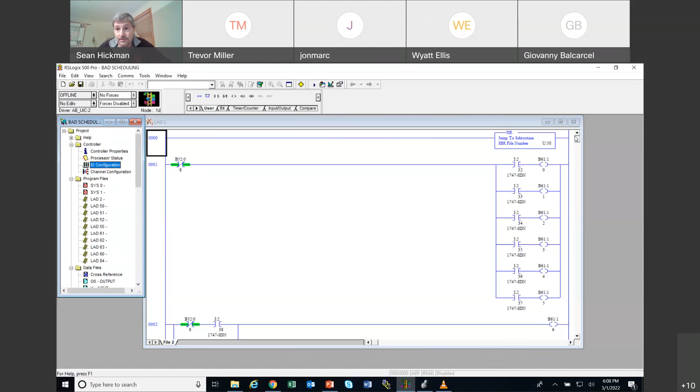But if you come here, you see that there are no rung comments. There's nothing labeled. There's a ton of bits. None of the inputs have anything on them for what is going on. Here's an unconditional jump to a subroutine in here. Here's your SDN. Here's your DeviceNet. Zero labels. I mean, can you imagine trying to troubleshoot this thing?

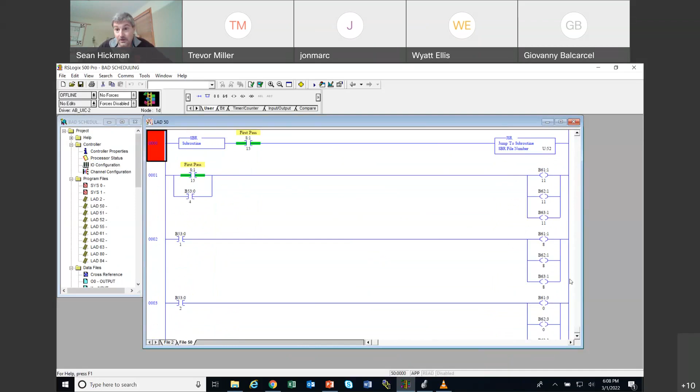Here's ladder 50. Once again, all kinds of bits being addressed here, parallel, series, a bunch of jump to subroutines. So jumping to subs within the subs. These ones are conditional jumps to subs. Ladder 62, here's your timers, your done bits. And it's just bizarro how crazy this is.

I don't know. There's a latch bit right there. I don't know what this is. Look at this. Latching all these bits on. If I come right here and I do a cross reference on this bit, okay, look at this. It's in different subroutines. You're not supposed to use this more than once, but you got this latch and unlatch being used in multiple different subroutines and everything like that.

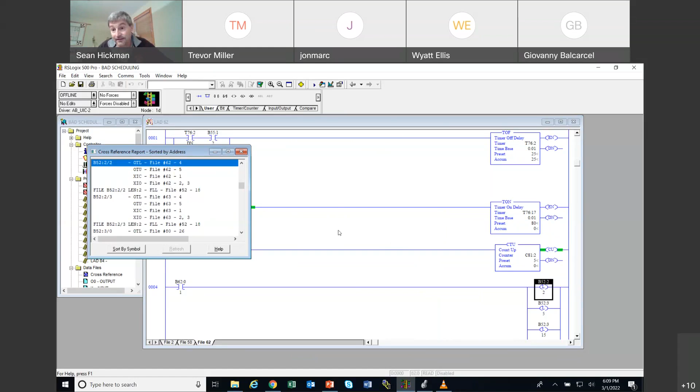So it's crazy. I couldn't imagine being a tech or a controls engineer and someone says, hey man, the press is down, go fix it. Something's wrong with the program. You'd never, ever be able to find out what the heck was going on here.

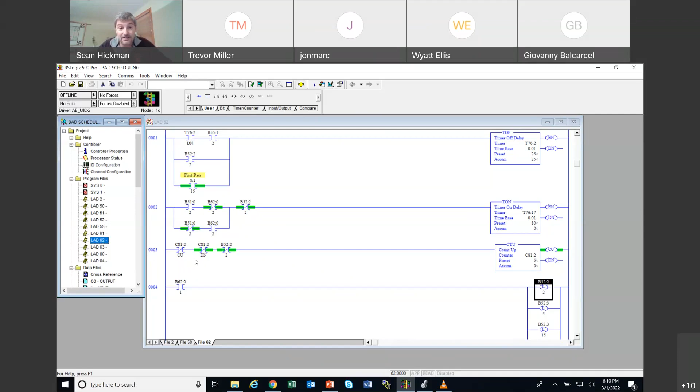And so as we move forward, I really encourage you to do a good job of mapping your I/O, keeping it organized, do a good job of rung comments, do a good job of coming up with tags that make sense and that are good descriptors of what is going on. Okay, so I always find that funny when I pull stuff down. Sometimes it's good, but a lot of times it's really garbage. I don't know why people do that. But anyways, bad programming.

Number systems and codes is what we're talking about. We're going to start with the decimal system. And the decimal system, we all know. This is the ones place. We start with 0 and we go to 9. And then this is the tens place. Once again, we're going from 0 to 9. But basically this is 10 to the 0 power, and this is the 1 spot. This is 10 to the 1 power, so that's the 10 spot. This is the 100 spot, 10 squared. This is 10 to the 3rd power, 10 to the 4th power, 10 to the 5th power, 10 to the 6th power. We all know how the number system works for decimal, okay?

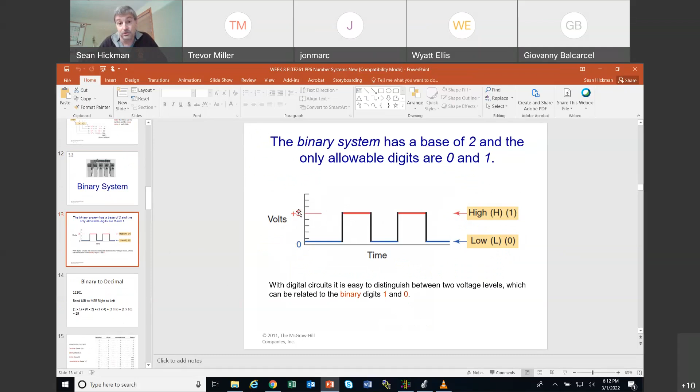And I don't want you to get too confused when we get to binary or octal, but just be aware that you don't have as many numbers to use. We have 0 through 9. Octal has 0 through 7. Binary has 0 through 1, all right? And binary, once again, is on or off. Here +5 volts triggers the high, and 0 volts is the low. But these thresholds could be 20 volts, whatever your machine is, right? But somehow you have a digital circuit distinguishing between on or off, between voltage and not voltage, with some threshold there. But our 0 and 1 is what we have.

And so what we have with our binary is least significant to most significant. So this is 1 1 1 0 1. I think everybody does pretty good at these. So I want to convert this to decimal. This is the 1s, the 2s, the 4s, the 8s, the 16s. It would keep going. So right here I've got a 1, a 4, an 8, and a 16. I just add all these up and I get 29. What do I have on my screen? I got 29, all right? 1s, 2s, 4s, 8s, 16s, 32s, 64s, 128s. So that's your binary to decimal.

I think I'm going to do another one here in a minute, so maybe I'll ask you that. But here's our decimal system. Once again, decimal goes 0 to 9. When we run out of numbers, we start over at 0, but we put a 1 in front of it. And when we go 0 to 9 again and run out of numbers, we go to 0 and advance the next number, and it keeps going like that. For octal, you only have 8, so you go 0 to 7. When you run out of numbers, you go to 0 and put a 1 in front. Run out of numbers again at 7, you go 0, you put a 2. Run out again, put a 3, okay? Hexadecimal has 16, so you go 0 to 9, and then A to F.

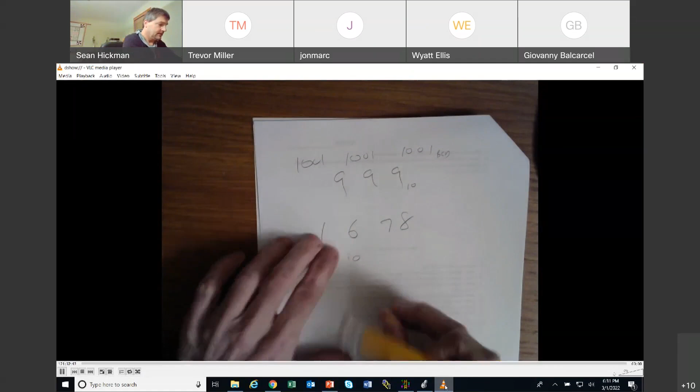Okay, so binary coded decimal, convert this. It's 1678. So here we go. I got 1 is 0001. 6 is 0110. So I got a 2 and a 4. 7 is 0111 and 8 is 1000. So there's my number right there. I just converted the 8 into this, the 7 into this, the 6 into this, and the 1 into that.

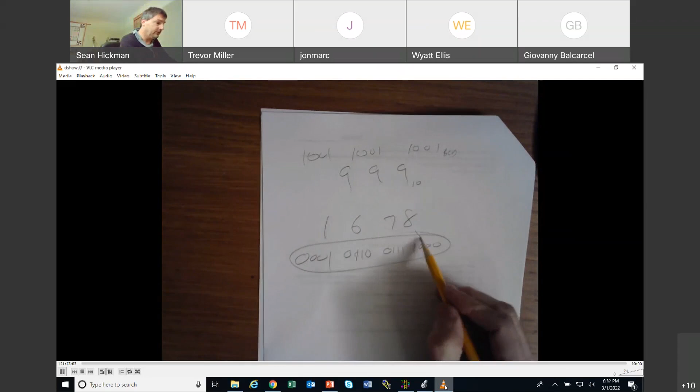And then I got to write BCD down here because it is not binary. It's binary coded decimal. It's different. And you'll notice if I come to my thing right here, I don't have the option of going to binary coded decimal. I cannot directly do that using my little cheat here on my program. You got to figure that out, but I think it's hopefully pretty straightforward, and that's what it's showing here.

I got 7, which is 1 plus 2 plus 4 is 7. 8 is just the 8s. This is the 6 and there's the 1. So how do you feel about this? That makes sense? Converting this decimal to the binary coded decimal? Kind of simple, right?

All right. To distinguish between them, you have to have designation. You know, base 2 means binary versus BCD means binary coded decimal. If it had a 10 here, that's just like a normal 49. That's base 10 that we work with. Or if it was 47 base 8,

presuming there's binary coded octal, oh my gosh, it's not really there, but you know, if you wanted to come up with a number system to defeat the Russians in Ukraine, or somehow mess up their computers, you go for it. You could do something crazy if you want to, but it wouldn't exist for anything that I know of.

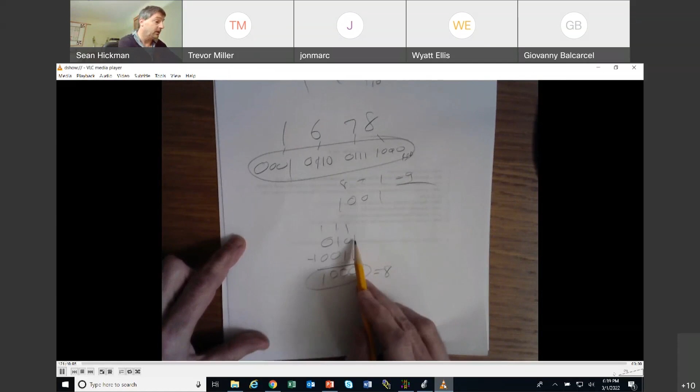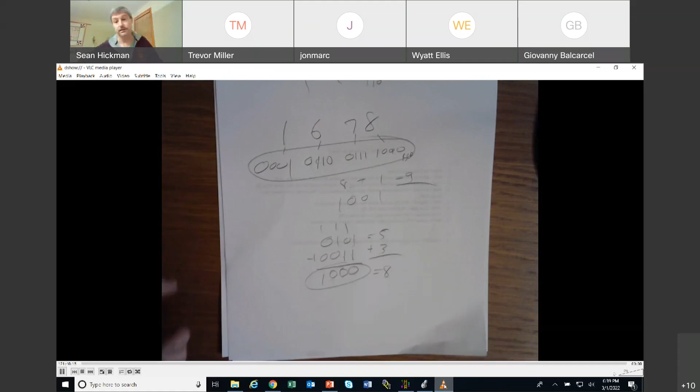8. Is that right? Well, let's think about this. This was a 1 and a 4, so this was 5, plus 1 and 2, 3. 5 plus 3 is 8. So it works. You can add. Does that seem reasonable to everybody, what I just did? Yeah? Want me to do another one, or you guys got it?

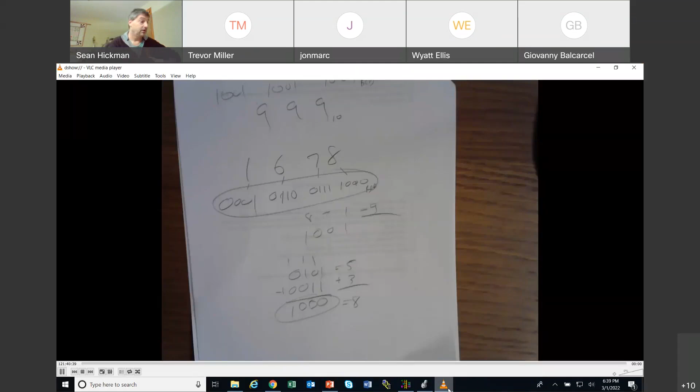Everybody okay? Let me know if you want me to do another one. I'll do another one. 5 plus 2 is 7. We all know that 5 plus 2 is 7. So let me just do 5 plus 2. So 5, by the way, is 0101. That's 5. Plus 2, 0010. That's 2. Okay. And so I added them.

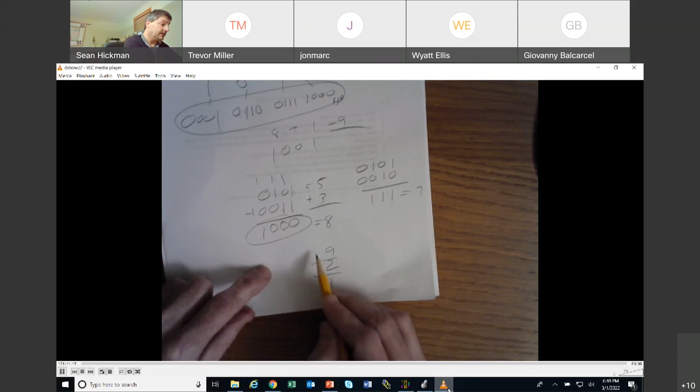I just get 111. So this is 1, 2, 4: 4, 5, 6, 7. It just adds right away there. I didn't have to do any carrying or anything like that. So just remember, when you do regular math, if you get 9 plus 2, there's no such digit. You run out of numbers, so you get a 1, you've got to carry the 1. It becomes 11. And that's all I was doing with all this carrying and stuff here. Mess around with it. I think it's in the textbook as well for you to take a look at.

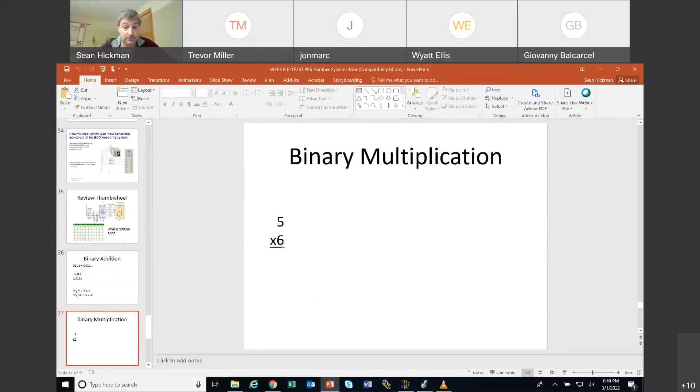Multiplication. 5 times 6. Let's do it. I'm doing 5 times 6. 5 is 0101. And 6 is 0110. So we do 5 times 6. So I would go 0000 because I got the 0 there. Put a 0 here. 1 times 1 is 1. 1 times 0 is 0. 1 times 1 is 1.

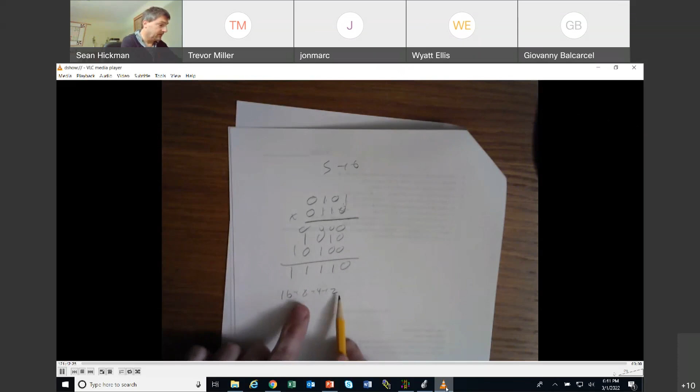0, 0. 1 times 1 is 1. 1 times 0 is 0. 1 times 1 is 1. 0, 1, 1, 1, 1. Ooh, is that right? So this is 2 plus 4 plus 8 plus 16. That is going to be 30. 5 times 6 is 30. So it works, just like our math works.

You just got to think about it a little bit, the way that you always have to carry if you have anything bigger than 9. In this case, if you have anything bigger than 1, you got to carry it. Okay? With a little practice, multiplying it as well.

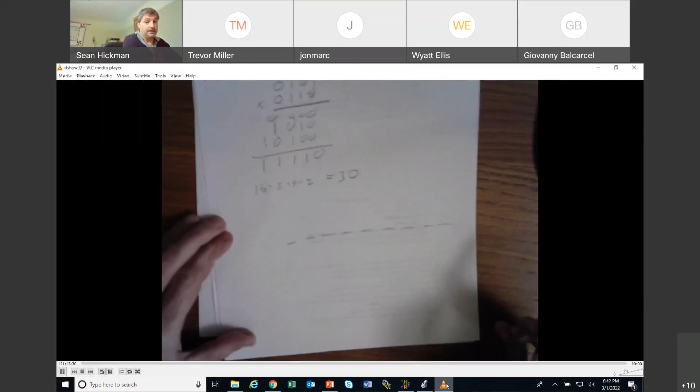Many PLCs allow you to change the format of the data on monitor displays. That's where I was just showing you the radix, where you can go binary, octal, hexadecimal, whatever. It's there, and I use it to cheat a little bit. So I use the PLC as a conversion. If I want to have a PLC move to turn on outputs 1, 4, 7, 10, and 12. So basically, you've got a word here, and if I wanted to output 1, 4, 7,

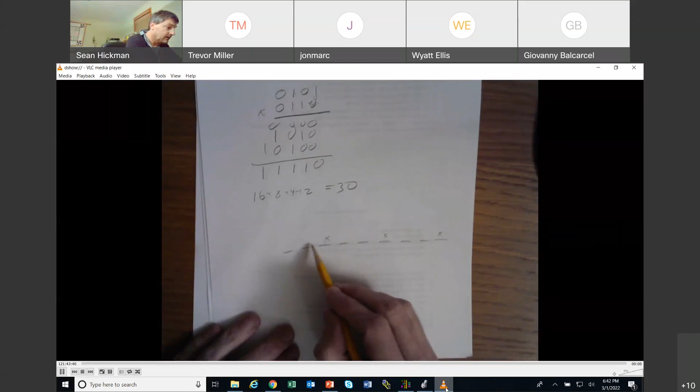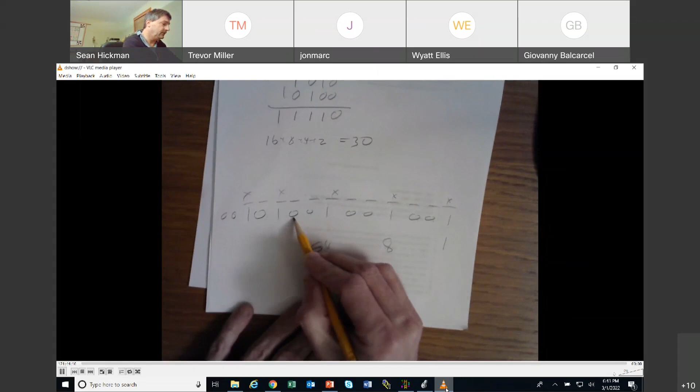10, and 12 on. If this was my word that I wanted to turn on those outputs, this is 1, 0, 1, 0, 0, 1, 0, 0, 1, 0, 0, 1. And then there's some zeros out here, but it doesn't really matter to me. Well, what I could do is I know that this is 1, 2, 4, 8, 16, 32, 64, 128, 256, 512, 1024, 2048. So I convert it and I add all these numbers together.

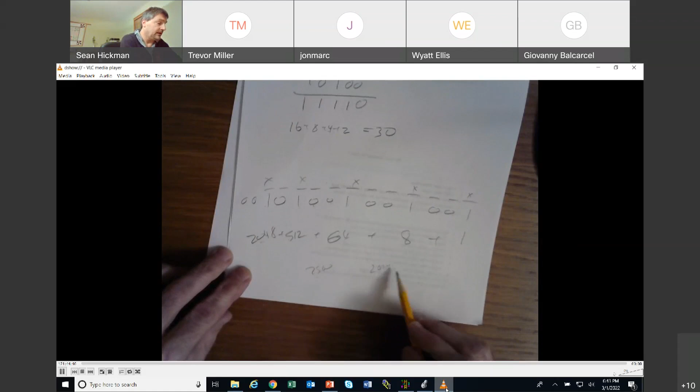I get, I don't know what I get. I get about 2560. I got 2560 plus 64, 2624, plus 9. I get 2633. That's my decimal equivalent to this number right here: 2,633. All right. So let's say I'm going to make a little program right here.

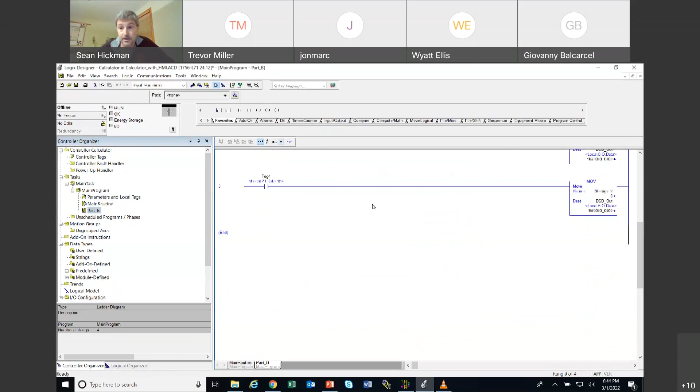Let's make one down here. I got to move this out of my way. If I put in a rung right here, and I put an instruction, something that's going to trigger this. And let's say I did a move. My number was 2633, and my destination was going to be my output module.

So do I have an output module here? It looks like I have a local 5 output right here. I just picked the entire output module of the controller. Let's verify that I did that right. Let me come over here. 5 is a digital output. Yep. So if I hit this switch, it's going to move the number 2633 into the output module.

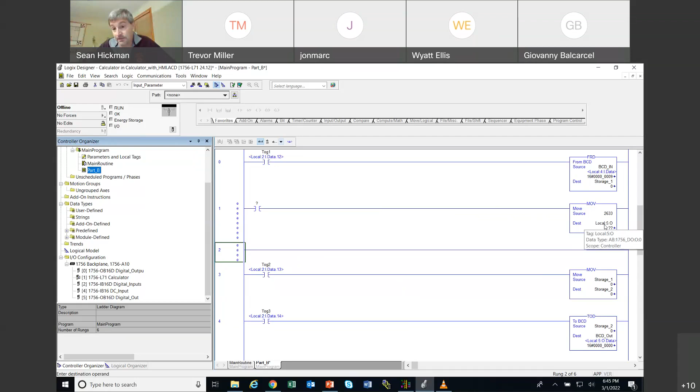Well, what does that mean? 2633 is represented by this binary number 0010 and so on. So if that output module gets that, then this light's going to come on, this light, this light, this light, and this light. And then those lights will be on: 1, 4, 7, 10, and 12.

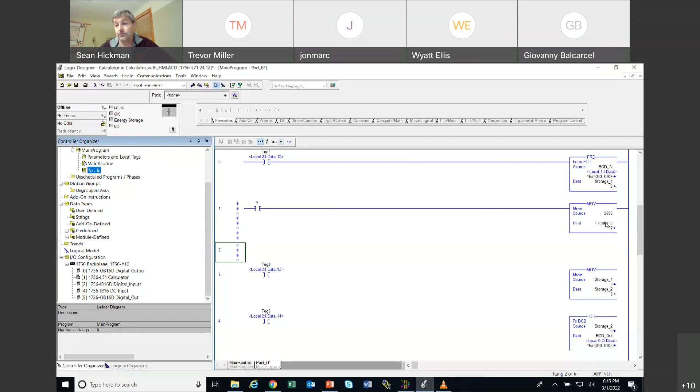All right. So as I explain this right here, moving a decimal number into that destination will turn on the lights associated with the binary version of that number.

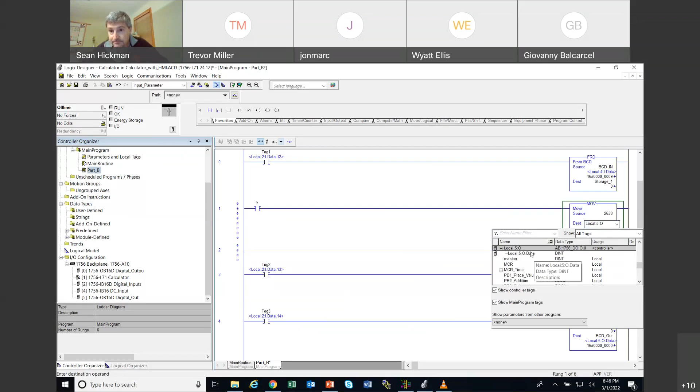I'll say it again. Moving a decimal number into an output module, not a specific one. I did not drill down here and pick data or anything like that. Actually, I should have picked data. I'm sorry, I should have. I got to pick data like that. I got to pick the whole module. That when I move this in here, I'd get a 1 here, a 4, 7, a 1, a 10. The ones would go there, and the lights would come on.

How do you feel? Do you understand what I'm saying there, on a scale of 1 to 10, of how that move works? Because we'll be doing it. You're going to be moving stuff. The output module here is a double word. So when you move ones and zeros into it, those outputs are going to come on, or it'll read inputs.

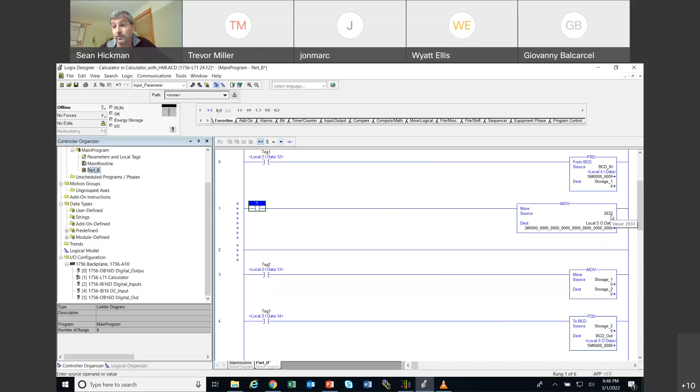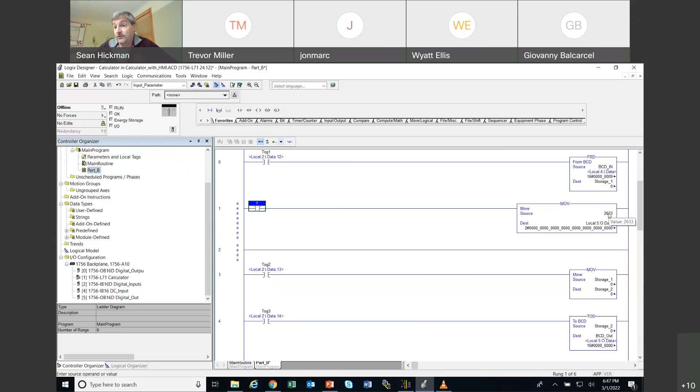So if I activated this, this double word right here would get moved into this, that would get moved into there, okay? And so this move takes this value right away of 2633, and then it'll move it and convert it to decimals there. Or you could do this. You could come right here. Oops, I was there anyways.

Watch this, everybody. Watch what I'm doing, because it doesn't take binary here. This move is taking a decimal, all right? Or it could take a tag, because we no longer have N7s in this. It'll take a tag. So I came right here and I called my local tags. My tag is masker. Sorry. I could come right here and I could pick masker. Okay. And then look what pops up, 2633, because that's what I had in here for my little cheat.

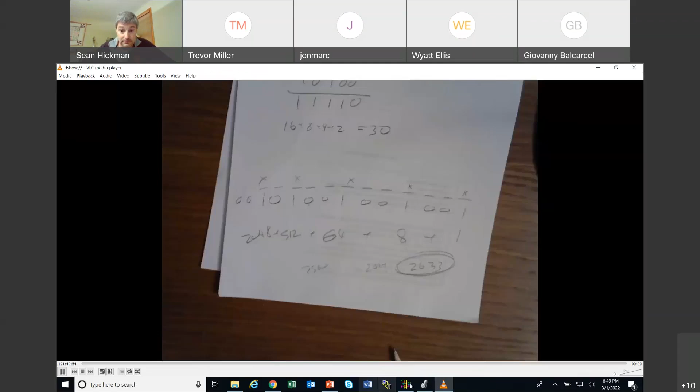And if for some reason I wanted 4532, I don't know whatever that is, 4532. Well, that's part B. It's going to move 4532 into this output module. Well, what is 4532? I don't know. Here again, sorry, I keep going. All of these numbers right here is what 4532 is, okay?

And so that's why being able to go back and forth between binary and a number is important, because a lot of times we're using moves and moving a number into a device, and this was an output module. Later on, we're going to be moving a number into a variable frequency drive. And each one of these ones means something. This one means forward or reverse. This one means accelerate, decel. This one means 3 seconds. Every single one means something. So whatever number you push into the variable frequency drive with a move is important.

And so you're going to need to convert those numbers, or put them into a temporary holding location. Mine's called masker. And then you could move masker into there. So when we're doing sequences, stuff like that. Basically we're going to be doing file and word manipulation, and that's why we're converting between the two. All right. So does everybody see how it might be important to know what this number represents as binary, if we move it somewhere that wants the binary number? That's what we're going to be doing.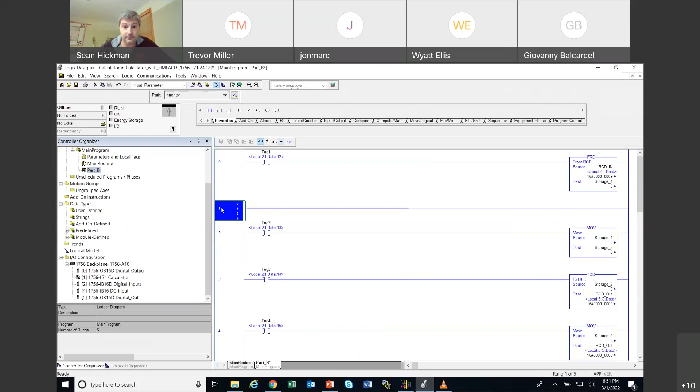So this I don't want. This I don't want. So what we're going to do is we're going to bring a number in to decimal, all right? And so this is going to be the command that I was showing you that does a lot of the math that was occurring in here, that instead of burning it onto a chip, the PLC's got an instruction set that does that math for us.

So it says BCD in, and that's local 4 I data. So it's going to take the entire status of the input module. So depending on what inputs you have on, like 1011011011 whatever, it's going to turn that into a BCD number, and then we got to store it somewhere. Okay, so that is what this command does.

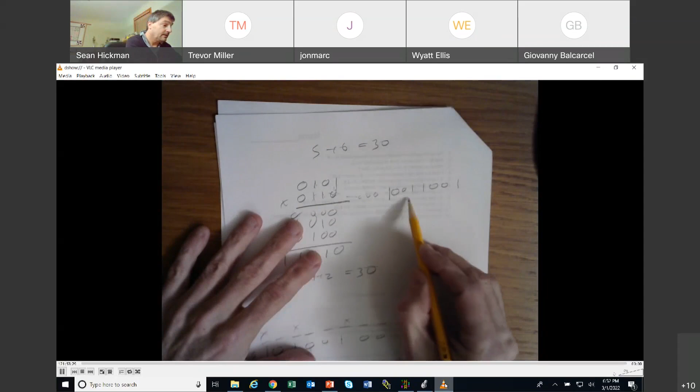And once again, if it's coming in from the thumb wheel, let's say I bring a number in on BCD, and I'll do an easy one once again. If it brings in 1001 1001 from the BCD, and these are all zeros out here, what number is it bringing in? A 9 and 9.

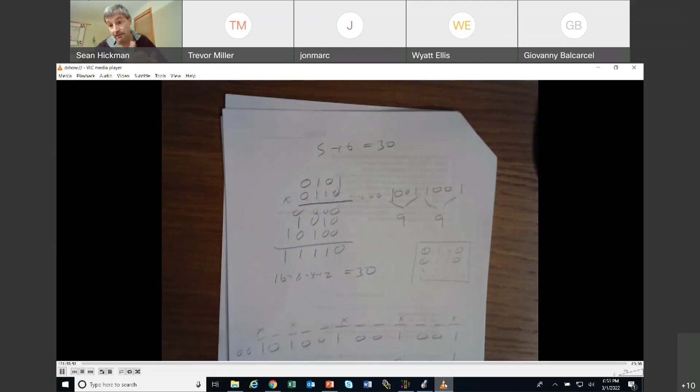And if I looked at my input module, right here, here's my input module, 3 4 1 2 3 4 1 2 3 4. I would see this input light on, this input light on, this input light on, and this input light on. And so that's what the thumb wheel is going to do to your input module. It's going to turn on a variety of inputs. We're going to convert it from BCD with that instruction.

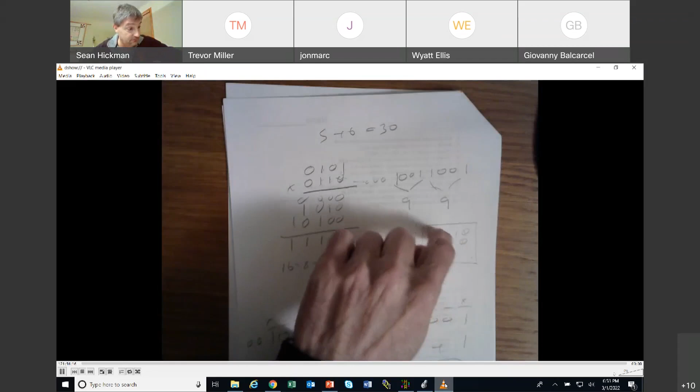And so 99 is going to get read into your module. And you'll see that that's what the thumb wheel will be set to, is 99. And so it converts these inputs here, just like I was showing you here. This is the output version of it, but the input works just the opposite. It's going to take those in as a BCD number.

It's going to put it in storage, and when we get done with this, we're going to massage it and do some stuff with it and store it. And when we get done with a new number, we're going to do a TOD, which is an out. This is taking it out, all right? And once again, it's going to take that value and push it out to the BCD out, which happens to be the entire output module.

And so if it does something to it and you push out a number, and for some reason your module no longer looks like this, it looks like it's only got these ones highlighted here, right? Well, that would be 00010001. And so you're going to get a 1 1. You're going to get an 11 on the LED readout.

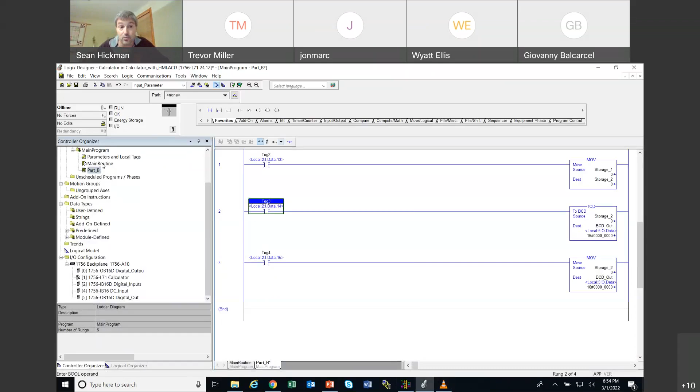Okay, in the computer, the PLC is doing this BCD conversion for you, because that's not part of a standard radix that you can come down here and look at. That's a conversion to that BCD. All right, so that is kind of an example of what we're doing with this lab when we're taking in this BCD in, and we got to put it somewhere. Is storage to a temp holding location? Where's that? On here.

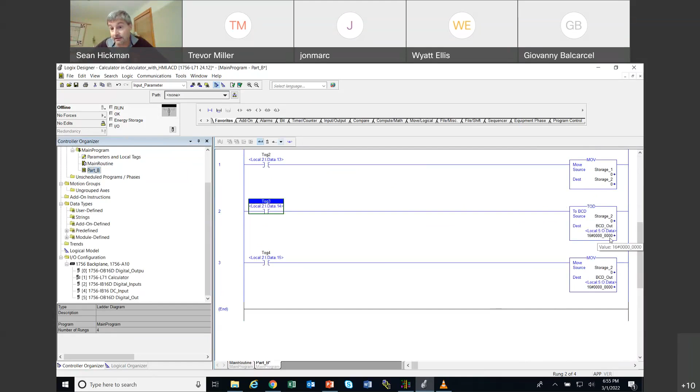So that's right. So you cannot directly move some of this stuff. You're like, I just want to take this thing, this BCD out. I just want to move that. No, it doesn't really like that. It would want you to take in this data that's been massaged, and it wants you to do a move to a location and store it. So there might be a lot of moving going on where you're taking data in.

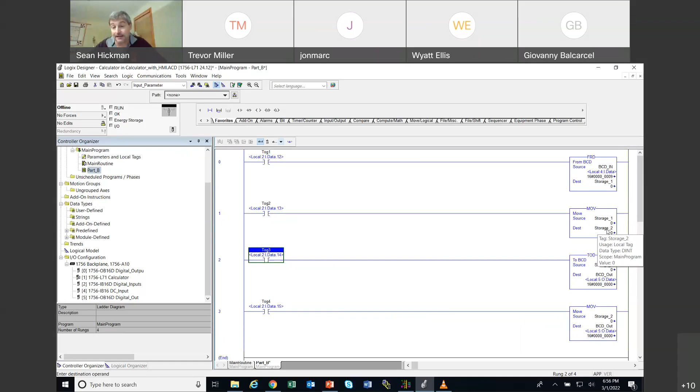You might be taking this data into storage 1, and you might move it to storage 2, at which point storage 1 and storage 2 have the same number in them, okay? Because this is always bringing in that number into storage 1. And then you can maybe take this storage 2 and later on multiply it and divide it and everything like that without messing up storage 1. So there's going to be a lot of temporary moving of this data.

And this data right here, just to reiterate, is going to be, where's my BCD in? That's what it is right there. Notice this is 1, 0, 0, 1 in binary, is what's coming in. But if you went to decimal, it's a 9. You set that thumb wheel for 9, it's going to pop up something similar to this, okay? And that works. That's 9.

Great, it makes sense. But if I make this a 1, and I come over here and make this a 1, so I got 1, 0, 0, 1, 1, 0, 0, 1, 1, 0, 0, 1. Well, this number right here in binary coded decimal is 999. It's 999.

But if I looked at it as decimal, not binary, it's not 999, because this is binary. It's not BCD, binary coded decimal. That's why we need that instruction right there in order to take that 1001, 1001, 1001, and turn it into that, okay? That's my BCD in.

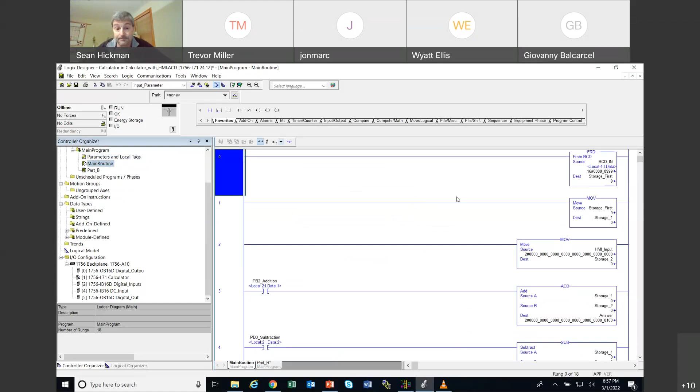And just remember, if I'm looking at a number here in binary, it's left to right, and if I click this, it expands it so it's shown vertically. So here's the binary bits: 1, 0, 1, 1, 0, 1, 1, 0, 1. If I put a 1 here, it's going to pop up right there, okay? So one's a way to show it horizontally and one's a way to show it vertically. Once we get into moving words, it's really important to see words moving vertically, but you can see data moving vertically or horizontally.

All right, so that's how you're going to start navigating and feeling good about going through these tags and understanding the radix that we're looking at, and whether it's better for me to work with a decimal number or a binary number. All right, so real quickly then, I got the lab right here.

It talks about moving and adding, greater than. We've done this, but that's just a little talk about it, to be sure you understand. Move and compare. So you're going to create a quiz master and a contestant. This first one, you're going to enter numbers using the HMI. So you don't need to worry about any conversions, because the HMI is smart. It's just going to take your number, 23 or 56 or 4791, and that's just the number that it is.